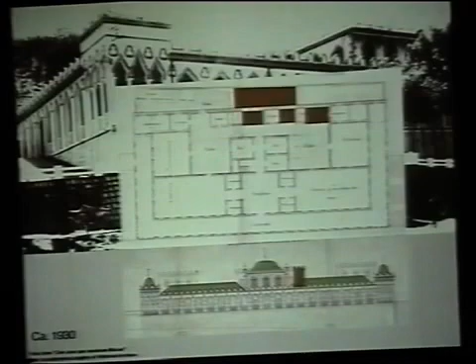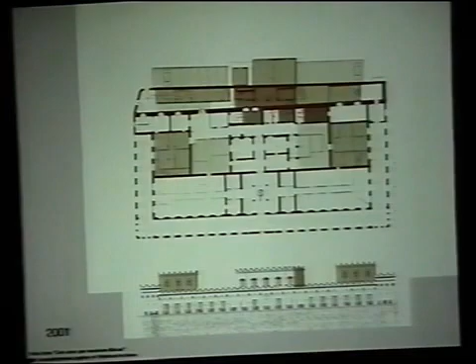I wanted to point out that I'll show the development of the building through time. The building has 3 front sides, and the back is against the slope, so it doesn't really have an elevation there, and it's organized around these 2 patios. This is the progressive occupation of the spaces with provisional and more or less precarious structures. The building initially had beautiful roofs that were substituted by slabs, and here's the building facing the inner port and China.

This is the state we found the building in, in 2001. The patios were completely built up. The back of the building had so many layers of construction that it had become impossible to access. This is the other patio, completely built. The front, one of the front corners, was in a very good state because it has the loggia, which somehow preserved the building.

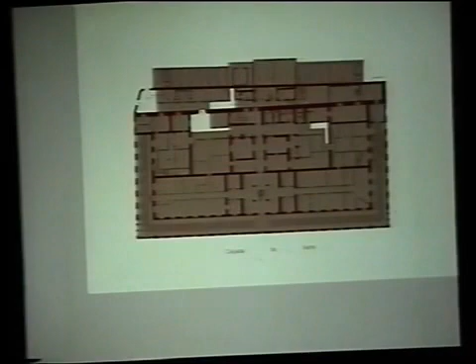So this was how it was in 2001, and this is how it became after our intervention. We cleaned up the patios. There were additions on these 2 sides from the 50s that didn't have access to the rest of the building, so we thought the best way to organize the building was to create a new elevation by occupying the back with vertical connectors.

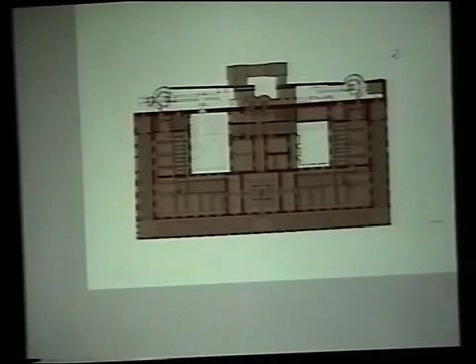Originally, the building had access. This is where they made the exercises, and it's the kind of mid-level between the top and the bottom. And by introducing these new connecting elements, we made the building work like one single structure.

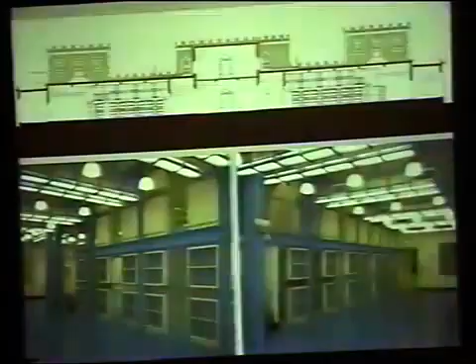This is the old halls of the building, and these slabs, we found out they had only 5 centimeters for a 10-meter span. So our intervention was to introduce this metallic structure, which we call the running trains, and it's only dry construction. There is no wet construction inside the building.

And the walls are maximized, and they have these shelves that either turned inwards for the archives on the top, or outwards for the working spaces.

And now I'll show you a sequence of going into the building. This is the loggia. And in the loggia, the only thing we did was repaint it white and introduce a new floor. The floor has a pattern that is taken from the railings, which is a 45-degree triangle, square grid, and it was blown up.

And what we did is introduce the lines with polished stone, so it has this feeling of just after a rain or a monsoon kind of feeling to the space.

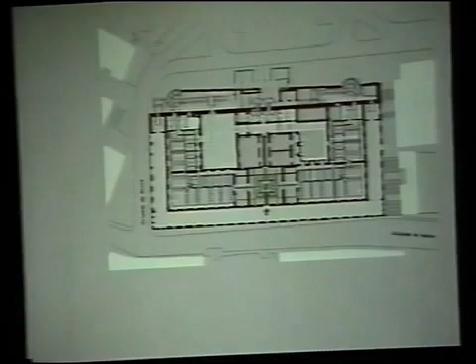This is the main hall. The building had progressively a lot of doors introduced here and here, and this actually is the main civic ritual of the building, coming up through these stairs or this road, and then transversing the loggia, entering in the hall here, and then going into the building through one of the two exits.

So what we did in the hall is we took out a very heavy wooden ceiling, and we introduced this false ceiling that is actually not in the center, so that it is understandable that it's a false ceiling.

And we tried to introduce or redesign these elements, as the building originally was tentatively trying to be an Indian or South Asian building with that kind of taste, and a little bit ingenuous, built on imaginaries of what would be India, because the architect never went to India. So we tried to work on this hybrid idea of the Indian imagery and

enhance it wherever it made sense, to give more strength to the building. So the blue are the offices that we saw before, the blue spaces, and the green are the reception areas for where they have the public attendance.

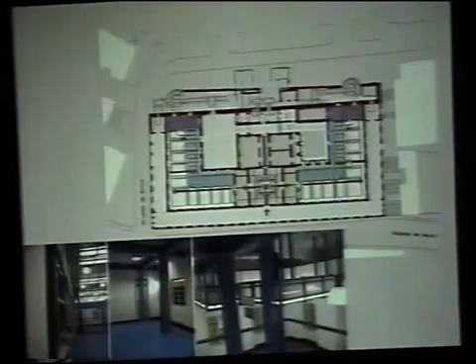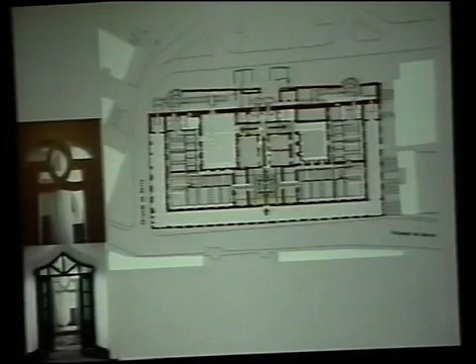These channels carry to these old doors. So what we did is we took the plan of the stairs that I will show you later, and the old wall, which for us is very significant because it was where the old building finished. And there is the old wall and the two circles from the plan, and the axis, the door itself is the axis. It looks a little bit like Gucci, but it's the plan.

So this is the cross ventilation system and the two patios after clearing. And this is the spaces that contain the stairs to go up, seen from this atrium.

You have one first flight, you arrive at this small patio that was existing, and what we did is we just broke the wall there and enlarged the patio so that there is a mid-level entrance for staff at the end of the axis. So the building had grown out of the axis, and we introduced this element in the right position, and some small landings, chatri landings here and here in the corners.

And these two stairs that you'll see next, which I always wanted them to be like two elephants with the raised trunks guarding the corners of the building.

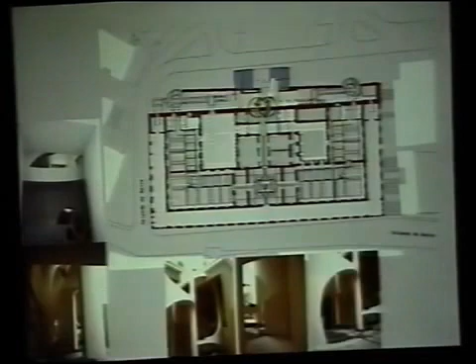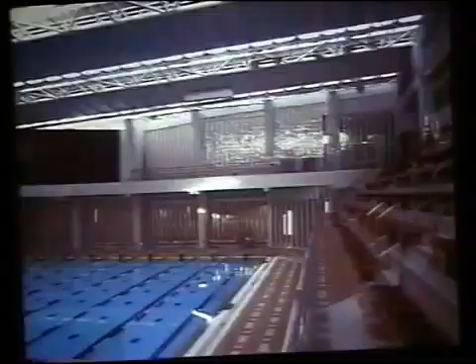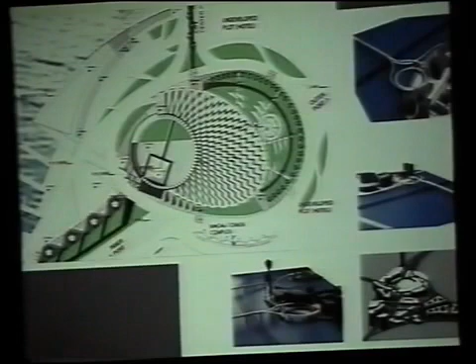So the square is a place that comes from the circle and extends out towards the water. What we thought was exciting was to design a space, because we are not in Southern Europe—we are not in a place where there is a strong and traditional relation with public space in that sense. It's more something experimental, and what we were interested in was designing a space that would be alive when it is empty, as well as when it is full of people or activities.

The big challenge for us was to design a public space that created a comfortable spatial situation where you have cars going around all the time, which is a little bit hallucinating. So this artificial hill, this object here, and a lot of the small artifacts that appear here are made to always kind of take you away from the traffic.

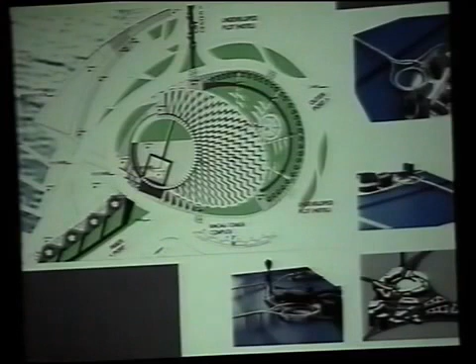These are proposals we did. This is the bridge that was being projected. We also, at the time, had ideas for the bridge to come in different places closer. The first one was here, where we bring the bridge right over the square, and it was like a car roulette, because we knew this was going to become a casino, so it was fun to have the cars going around like a roulette. But the casino people didn't like that. So this is the square, and the road back to the city.

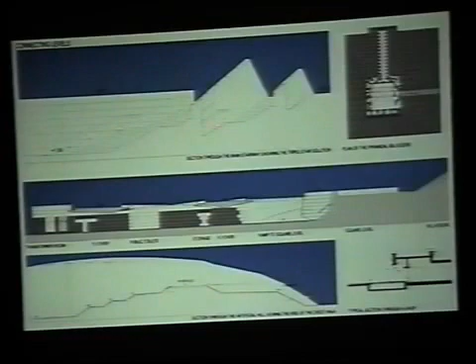What was also very important in this scheme was how to create the connections from the square road level to the lake level, so that access from the center and access from the square to the waterfront park could be natural and continuous.

So this square actually has this first flyover that completes the circle. It's a place where you go down and pass under it. So there are two flyovers, and here's one of the flyovers.

The flyovers look very elegant, and the reason we arrived at this solution was that Manuel, our partner, is very lazy and doesn't like to walk, so he always goes around by car. He said, we cannot have the sidewalk higher, because then with the railing, when I go by car, I never see the view. I always have this problem. So what we did is we lowered the sidewalk, and the edge of the flyover became very, very elegant. It almost looks like it's impossible to stand.

So these two walls contain the monumental stairs.

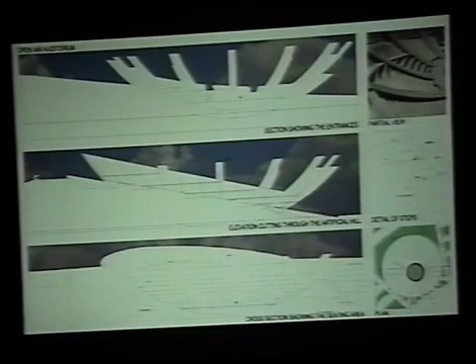And the auditorium—we never thought of this auditorium, as this was the only requirement we had for the space. They only needed an auditorium to look at a mega screen that was here, which doesn't project anything. So we didn't want to turn the auditorium to the screen because it would look kind of circumstantial. So we tilted it, and actually it's just a space inside a space, and depending on where you sit, you can either be in an enclosed space or look out towards the water and the square.

This is the 12th finger that we were requested to break because the entrances were very small. So we were very happy when we realized we could break it and keep it here, so that there is a linking element from the square to the small auditorium.

And this auditorium, we didn't know what it would be, but it has a lot of activity. Old people go there to play Tai Chi, and the fingers have become very popular with kids. They have competitions of roller skating, and it's very popular for sliding.

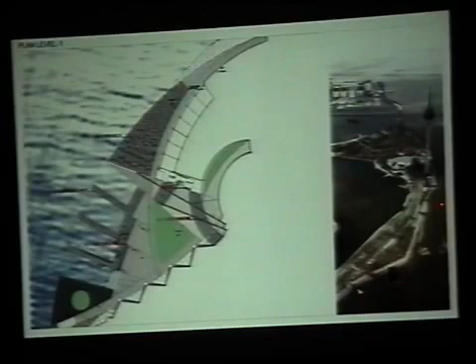This is the lower level, the ramp, and the waterfront park. There are several shops here with this wooden deck right on the water, which is here. And the two flyovers, one is there and the other one is there.

And this is from the tower. There was a very exciting period last summer when on the mega screen they had bungee jumping from here, where the picture was taken, and an advertisement of Panasonic showing a guy jumping into the square, so you feel like you see this image where you're going to crash into the square. And you are in the square looking at the screen, so it's a simultaneous experience of space and image, which is really, really exciting. But they don't show it anymore.

After the square, the bridge was built, and actually the plan is not complete. So this is more or less the outline of the lake. We did this park, which is just built on the leftovers of the bridge and the roads at ground level. And the bridge is a very monumental object, and it comes down in a very strange way. It has these two flyovers to this side and this very big tongue coming in on the other side.

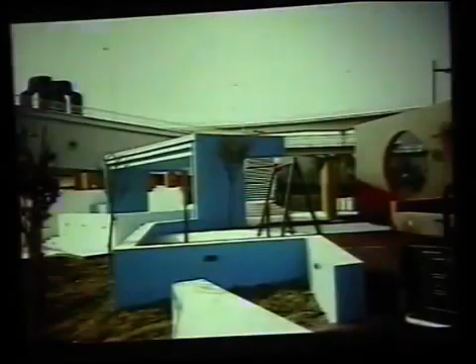There were a lot of issues that we thought were important—again trying to use this opportunity to create pedestrian places for people to use in a leisurely way, which are very close and overlapping with cars, but which in some way can coexist.

This is the children's park, on the river side of the water, with a mega slide, which is fun because when it's full you have a lot of kids sliding at the same time and they'll all crash in the center.

And the bridge, we did this small pedestrian bridge under the bridge. On the lake side there are these three levels of water. There's a fountain that projects water to this tank, and from here the water has a channel that takes it out.

What I like about the scheme, which was not completely controlled in the design phase, is that this element, which is enormous, became a kind of curved water duct, a macro structure that frames the landscape.

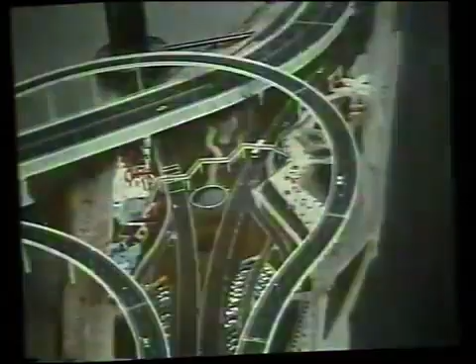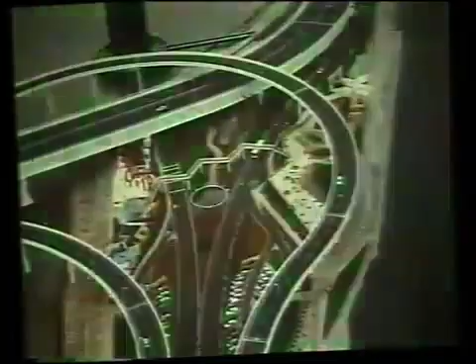Again, seen from the tower, it's this area and this area. And this revetment was very badly done in a very short time by the people from the bridge, so we could not add more than two meters or reduce it by more than two meters. But we wanted to work on this kind of pattern that we thought was coming from, that was very much like the pattern we find in the landscape of these mountains around us.

This is our two masterpieces sitting on top of the park, on the tower.

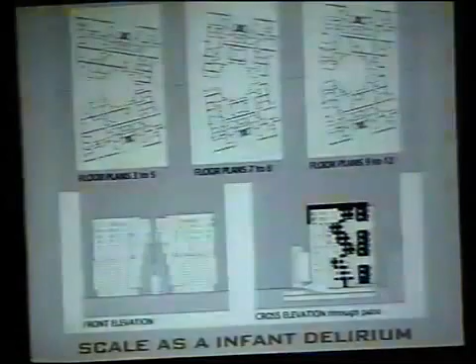This is actually my first commission for a high-rise housing scheme. It was never built. There was a mountain on the back, so I wanted to create this patio, with the main road on the front. This patio is like an entrance patio, and you have this movement of volumes that are not so obvious in plan as a cylinder, but give you the sense of the cylinder ascending.

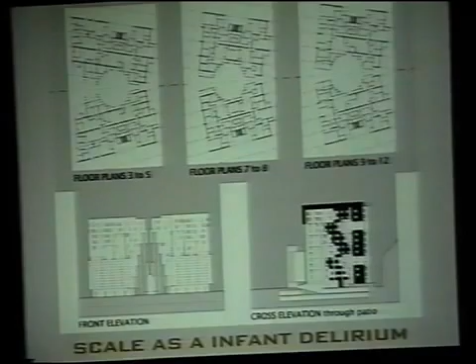Then it didn't go through, and I found myself working on this instead. I had nothing else to do, so at a certain point I realized I was building my first high-rise — vengeance to the client.

In 2003 I heard a conference by Oscar Niemeyer, and he talked a lot about how he designed buildings with one line. I was trying to do a chair with one line for a long time, and after hearing him talk about the buildings he was doing in Niterói, which were all done with a single line, and that extended to most of his work.

And right after we came from the fair, we had a client in China whose plot was right in the center of a city in Hunan province, and he wanted to build a bank. This object, the plot, sits on the crossroads of the three roads that give access to the center, so it's very much the center, and there's a very famous mountain nearby, the Moon Hill.

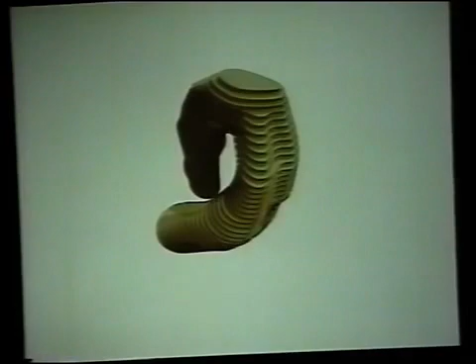He wanted a bank and a housing tower, and he said he wanted two buildings, but it had to be one building. It sounded impossible — we tried to make him reconsider, but it always ended up being the housing: you could not see the housing, but it had to be there, and it had to be a separate building that couldn't look like another building. So we became excited about the idea of making one building fall down and become two.

So this is the bank tower, and this is the housing tower, and they meet here in a restaurant and sports facility that serves both towers.

And now I'd just like to show you a short movie that we did for the Biennale on the Square.